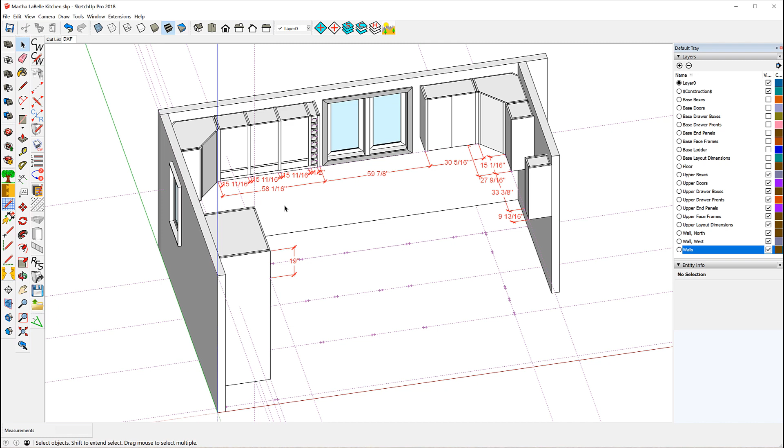So what we need here, I think the only thing we really need to know is notice that there are three similar boxes, or identical boxes actually, and they each have a 15 and 11/16 opening. The total box is 58 and 1/16. And notice that it starts right here.

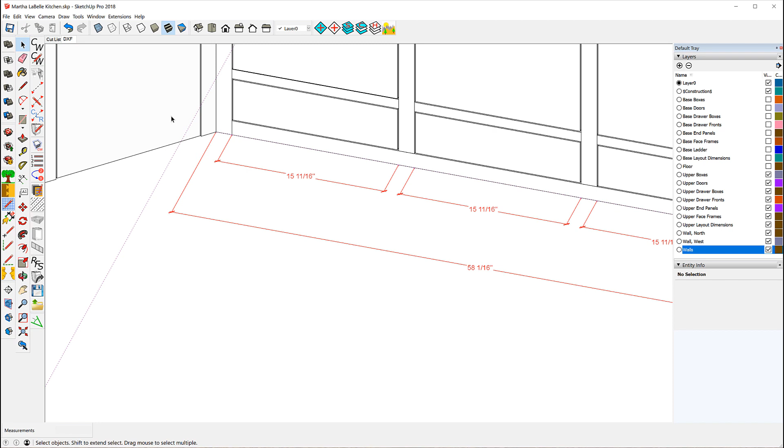It shares the same connector with this corner cab. You can see that here. This connector is the same connector as the corner cab. And you'll see how we do that in a moment. I think the only thing we have to remember is 15 and 11/16 opening and 58 and 1/16 total length. Let's get started. We'll go back to our model.

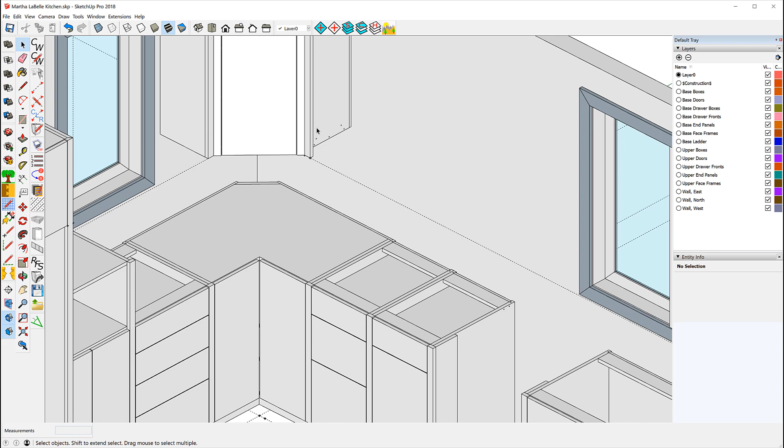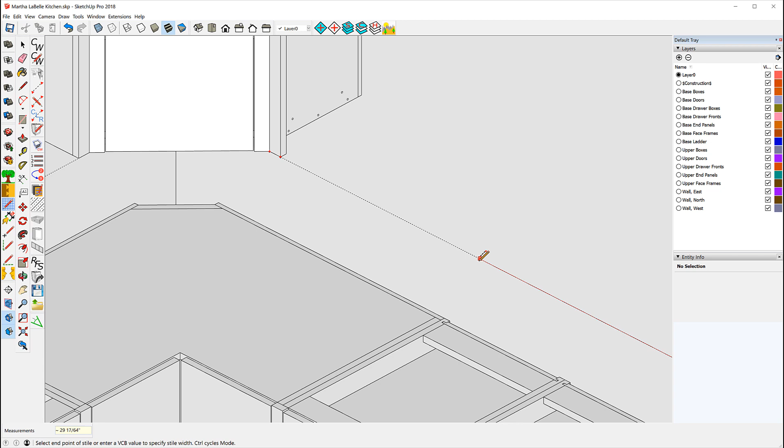Okay, here we're going to start with our story stick. And as I said, we're going to share this connector stile. So we'll start here, come out, make this a left connector. And now the total length, I'll use the distance tool, total length is 58 and 1/16. We'll come back this way, and that end is going to be a right stile. So there we are. Now we'll do the first opening.

And again, I'm going to use the distance tool, and that's 15 and 11/16. This is the opening. We don't want to encroach on that, so we have to come to this side of the marker. And we have our first connector. And now we want to use the distance tool again. 15 and 11/16. And again, we want to go to this side.

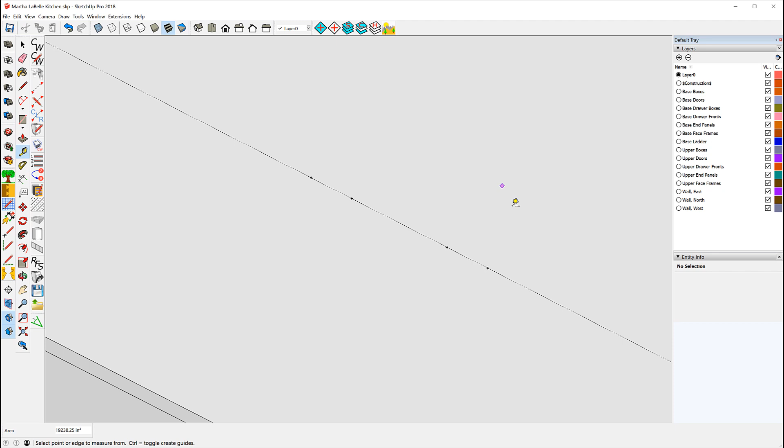One more time, we'll use the distance tool. 15 and 11/16, and we'll come over here. Now, if I remember correctly, this should be 3.5 inches, that opening. So let's measure that. Sure enough, it's 3.5. So now we have our story stick.

Now, let me go look at the reference drawing. Here's the reference drawing. This cabinet, this box, is going to have two compartments. One's going to be a drawer, and the other's going to be a door. Same here and same here. This one's going to have quite a few. 1, 2, 3, 4, 5, 6, 7, 8.

Now you'll notice that the divided upper only allows for the definition of 6 compartments, I believe it is. Or maybe it's 7. But in any case, it's not 8. So we have to do a little trickery. One of the things we can do is we can edit this cabinet just to see.

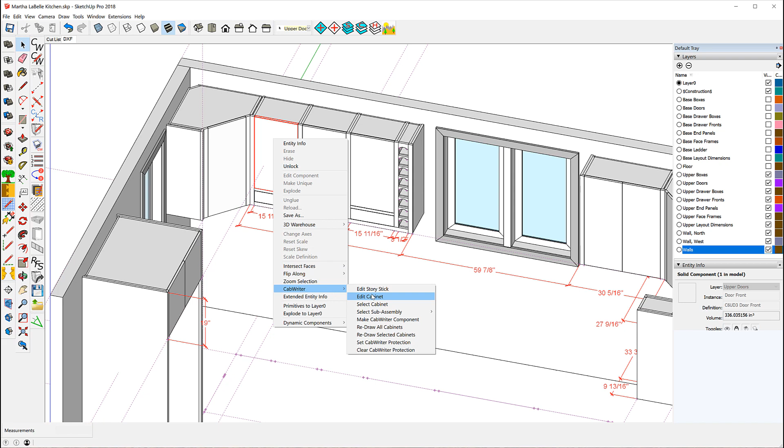Notice as I edit this cabinet, this one right here has 6 positions, or 6 partition positions, allowing for 7 actual compartments. And these numbers I'm not going to remember. So I've taken a picture of them and I'll save them.

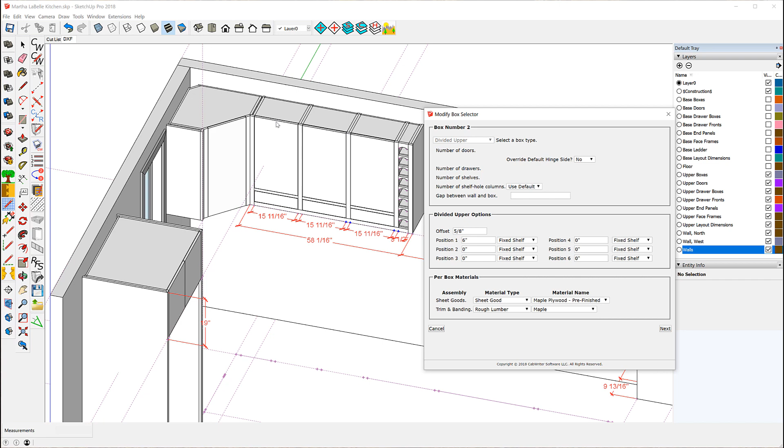Now these are identical, so if I say next, these are simple. There's a 5/8 offset and a 6-inch compartment here. And then the remainder of the box. I can't remember those, but like I said, I took a picture. So let's cancel this and go back to our model.

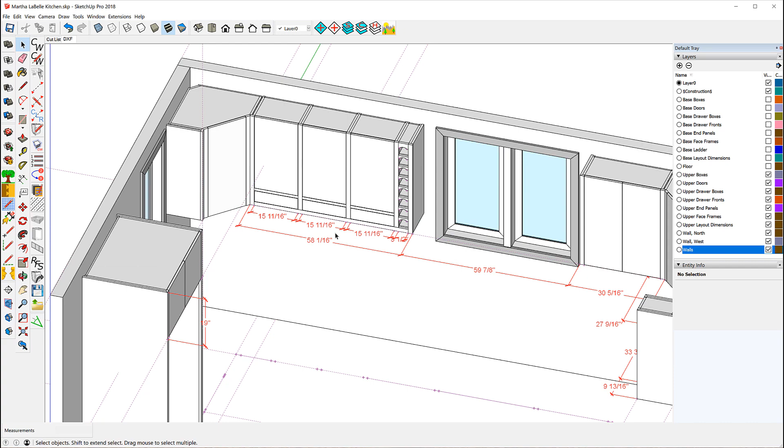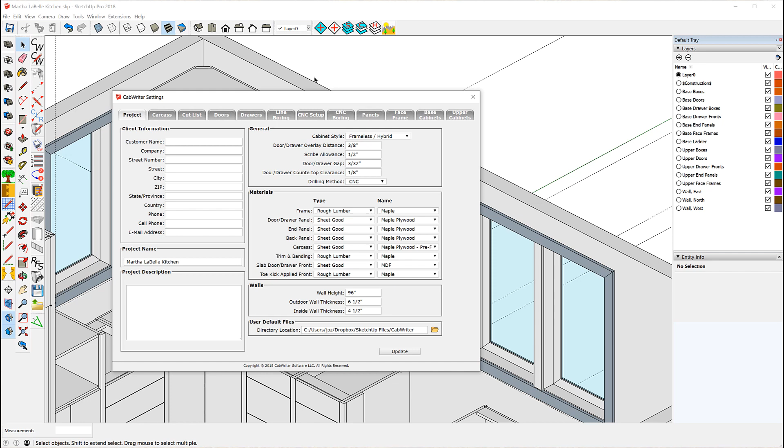Okay, so first thing we want to do is open up our user defaults and see if we have a wine cabinet set of defaults, and we do. So we're going to use those. We'll load them. And we can close them. We don't need to look at them right now. Let's go back to our story stick. And let's hit end.

Now the first thing it's telling me is that I have an opening that's less than the default minimum opening. In the defaults I have a minimum opening default which is set to 6 inches. And sure enough, this is 3.5 inch opening. Well, I'm not going to put a door on it or a drawer or anything like that. This is a wine cabinet.

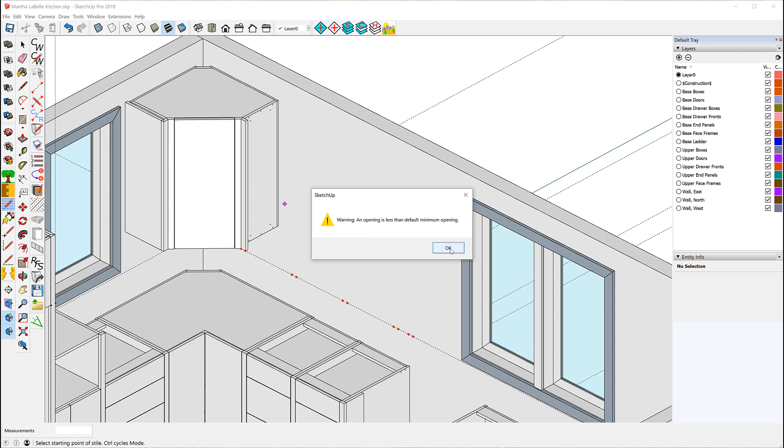It's going to be open, so I'm going to ignore this. Notice this is just a warning. It's not going to stop me from doing anything. So I'll say OK. And that brings this box up.

And it's looking at this first box. It wants to know about this first box. Well, I have my picture, like I said. And the first box is simple, 5/8 and 6. The wine cabinet is pretty complex. I'm just going to keep these off camera where I can refer to them, and then I'll just plug them in.

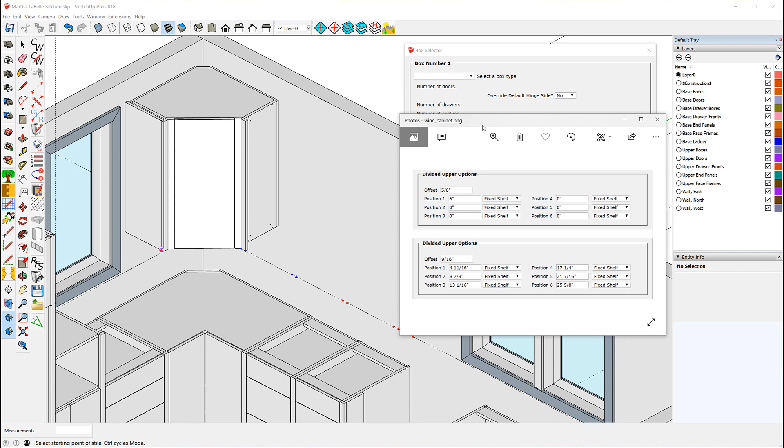By the way, these numbers I arrived at through an iterative process of guessing what they would be, drawing the cabinet, figuring out how much they're wrong by redrawing the cabinet with another set of numbers, and I think I probably even iterated maybe 3 times. You're going to have to do the same thing if you're designing this from scratch, but since I've already designed it in our reference model, and this is a course on how to use CabWriter, not how to do cabinet design, I'm going to just copy these numbers. So I'll leave these off camera and just refer to them.

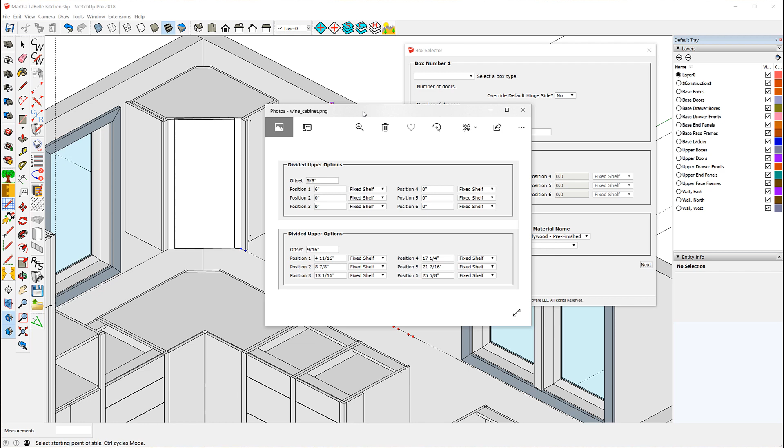Okay, so we'll select a divided upper. Notice that these become unlocked so I can enter the values I want. And first thing I'm going to enter is 5/8 for the offset, 6 inches for the first position, and I'll hit next. I want this next box, this one here, to be the same thing, so I'll just hit next. I also want this one to be the same, so I'll hit next.

Now I'm going to change things. This is going to be 9/16. This will be 4 11/16. 8 7/8. 13 1/16. 17 1/4. 21 7/16. And lastly, 25 5/8. And we'll hit OK and see what we get.

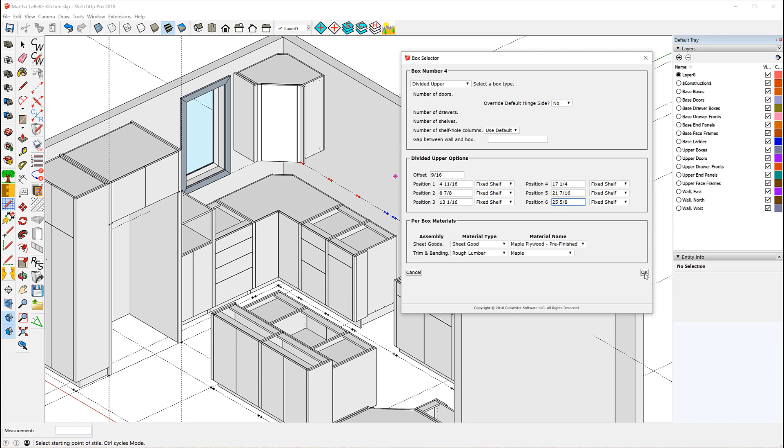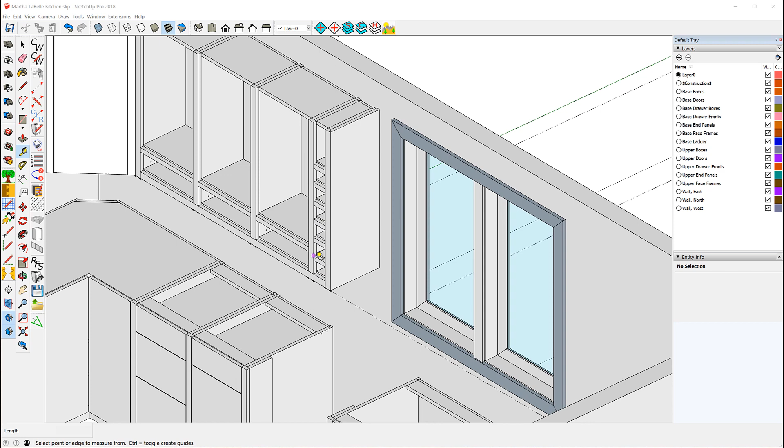There we go. We have what we wanted. Notice that I don't have enough dividers to finish this, but that's not a problem. I can just copy these up. The thing I want here is I want to keep my divisions equal. For instance, if I measure the distance between here and here, that's 4 3/16. And so what I want is for this next one to go up 4 3/16.

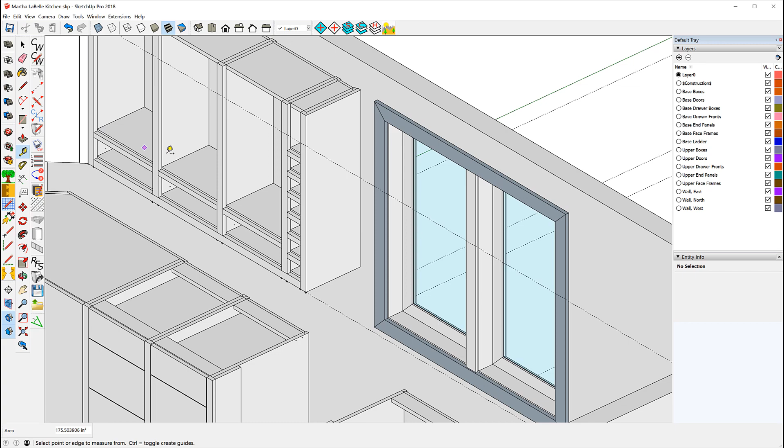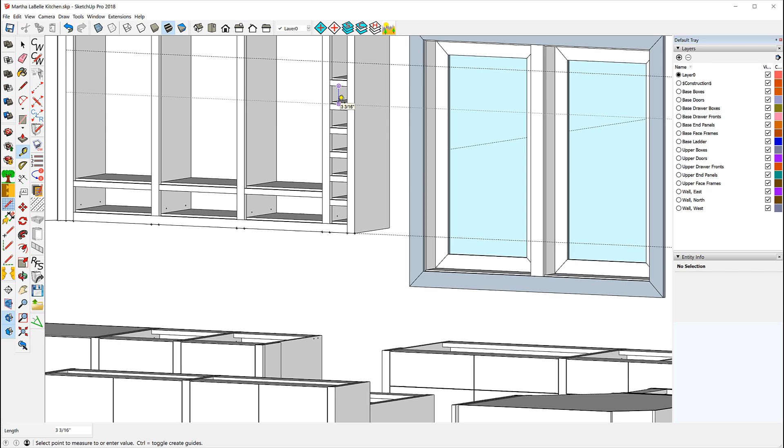And let's see if that looks right. That'll give me an opening of 3 3/16. And I think that's correct because that's 3 3/16. Okay, so what I want to do, and it looks like I have to move it up twice. Let's move this one up 4 3/16.

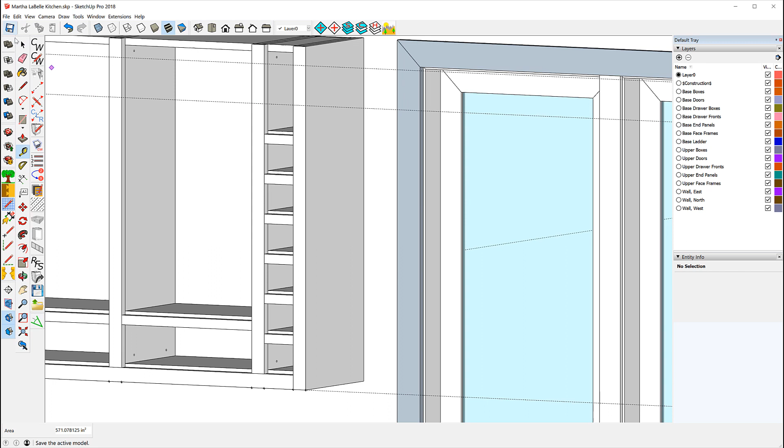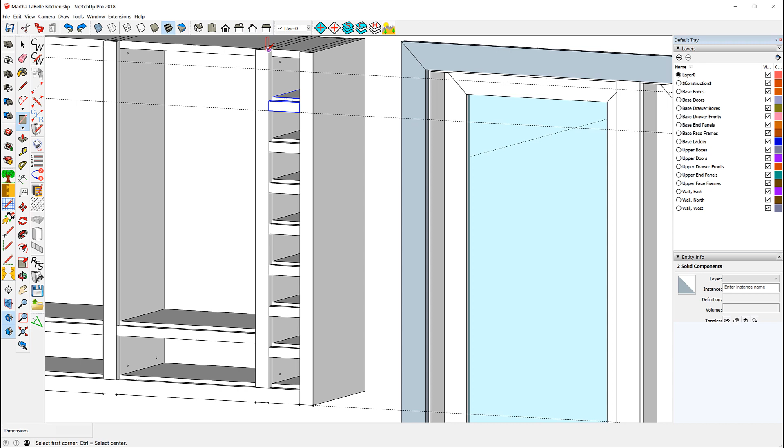Well, I think here's what we're going to do. We're going to take these two, unlock them, do a move copy right there. And now I think what I'm going to do is make a part to fill in here. So let me take the rectangle tool. Let's make a part right here. Push-pull it in to that point. Make it a component. I don't care about the component name right at the moment.

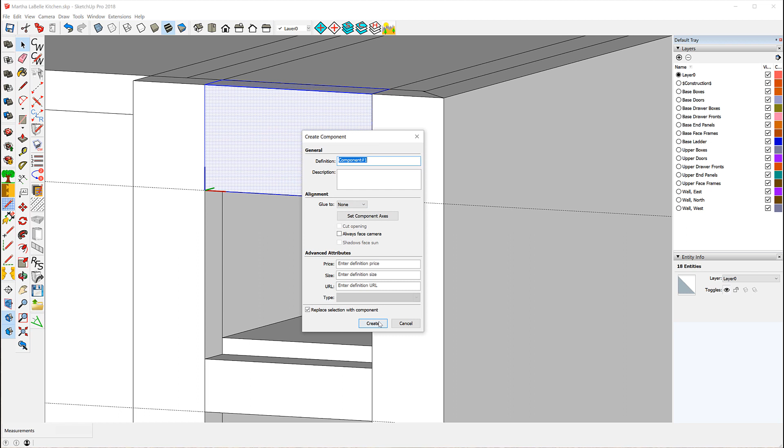What I want to do now is I'm going to use the Make This a CabWriter component tool to make it an official CabWriter component that follows the CabWriter rules. So I'm going to attach it to this cabinet, which is C24R, right there, C24R. And I'm going to make it part of the face frame. And I'm going to make it a mid-rail, just like this.

So let me make the C24R component type, part of the face frame. It's a mid-rail. And I'm going to call it upper wine rail. And since there's only one in the model, I'll give the instance name the same. I do want it CabWriter protected, so if I redraw this cabinet, it will still be there. And so notice now my definition name is C24R face frame part, upper wine rail.

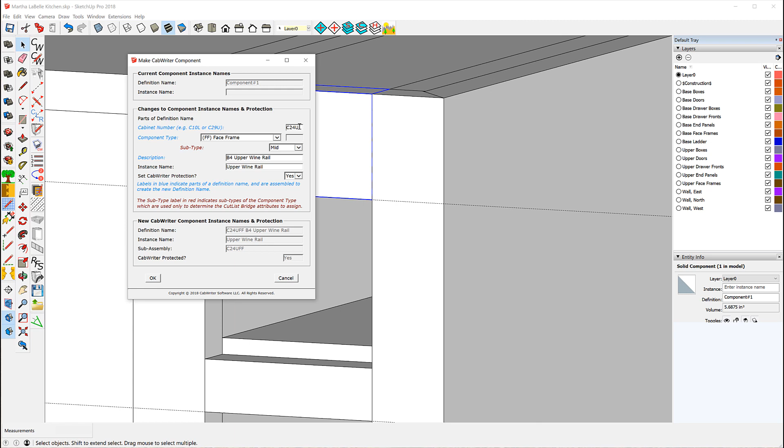And I can actually make this part of box 4. I'll make it part of box 4. So it's C24R face frame box 4 upper wine rail. It's called an upper wine rail. And I'll just say OK. C24R, C24U. Yeah, it's a U. And if I now look at this, it's C24U upper face frame box 4 upper wine rail.

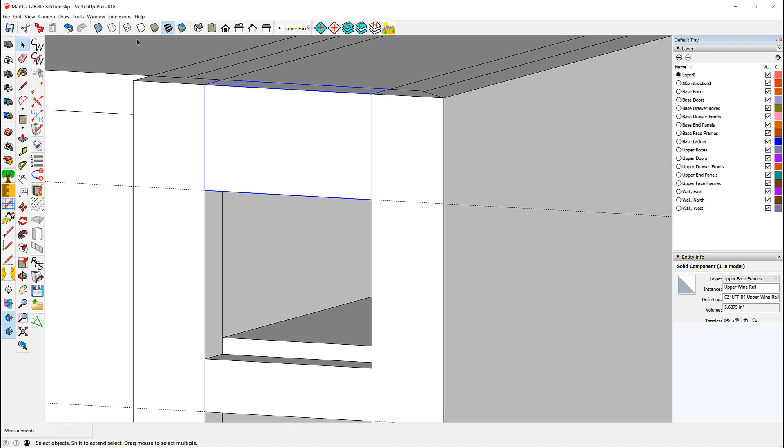And by the way, because we called it part of the face frame and a mid-rail, notice what happens if I look at the extended entity info. I've got all of the information about resizing and everything else in there. Okay, so now we've done that. Recall that I offset this by 9/16. What does that mean?

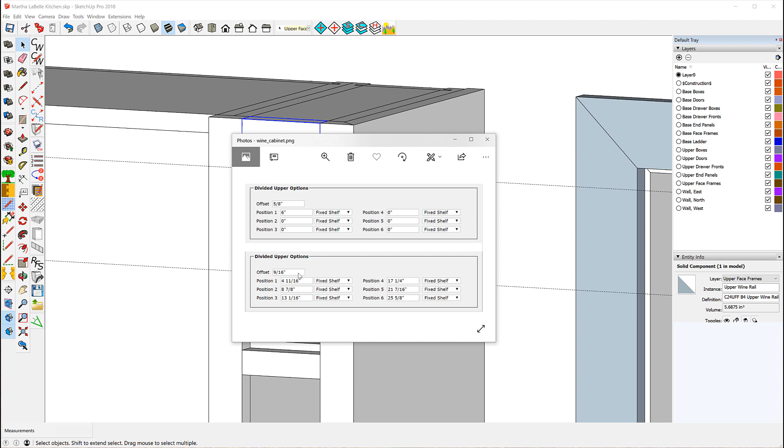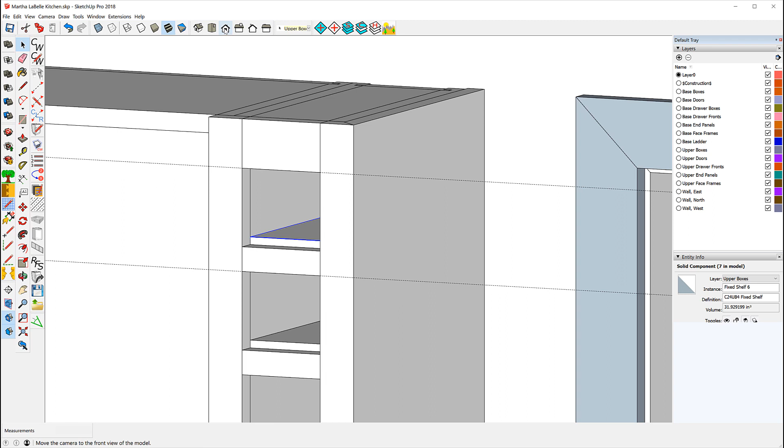That means normally this part here, the bottom of it, would be lined up with this, but I offset it 9/16. In other words, if I were to look at this face on and look at the X-ray, this is 9/16.

So what I want to do now is, to make the maximum opening I can, I'm going to put a little arc here. So I have a lot of opening for the bottle, but I don't want to go to 9/16 because then I'm going to run into the bottom of the shelf. So I'll cut it back by 2/16 and go 7/16. So let's try that.

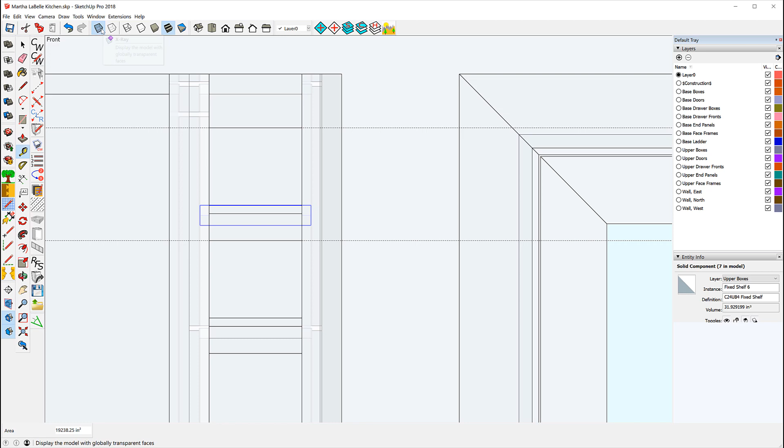So I'm going to move this up to 7/16. To be safe, I'll make another line. I'll just move that up 7/16. And by the way, while I'm at it, I'm going to do this one too, 7/16. And I'm going to come in a 1/2 inch. And I'll come in a 1/2 inch here.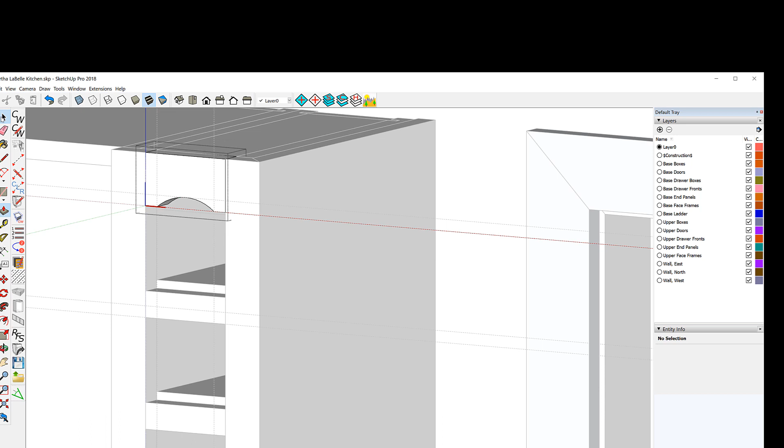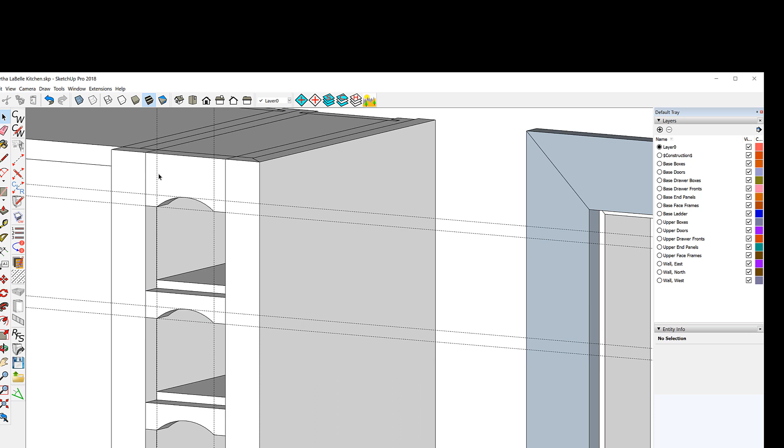Now I'm going to edit this. I'm going to use the arc tool. And I'll do the same here. Going to unlock all of them. Use the arc tool. Push that through. And clean up my... get rid of some of these.

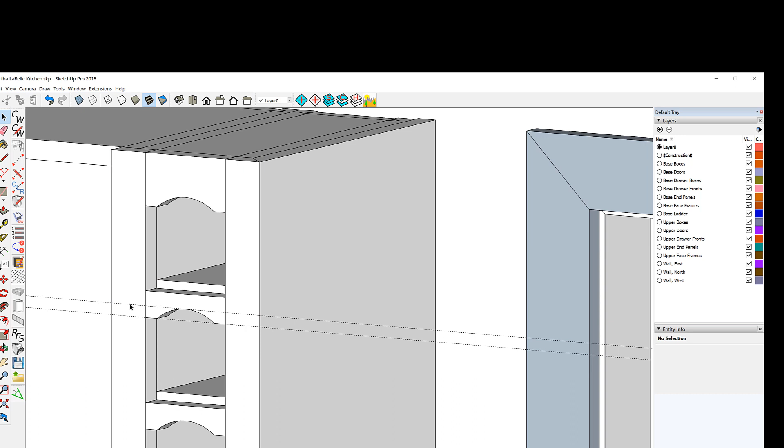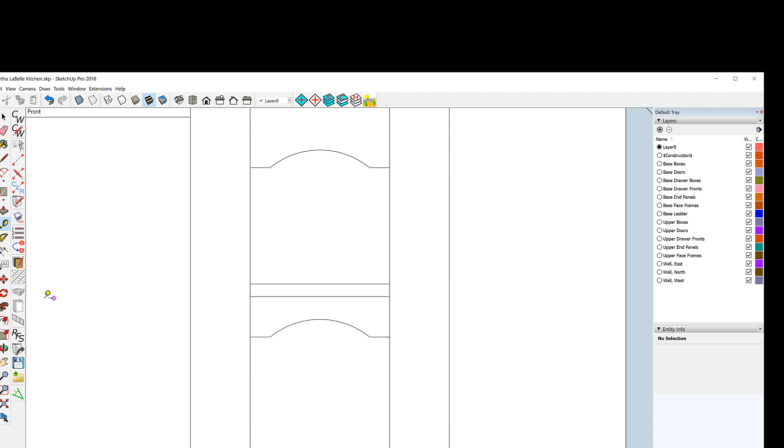All right, now what that does is it gives me an opening. Let's just look at this from the front. Gives me a wine bottle opening of 3 5/16. Most wine bottles are 3 to 3 1/4 inches in diameter. I feel good about this for a couple of reasons. One is it gives me 1/16 of an inch margin, but it's actually more margin than that. Because if you start putting the wine bottle in at an angle and push it in, eventually the neck gets narrower. So you actually have more margin than you think. So that'll work fine.

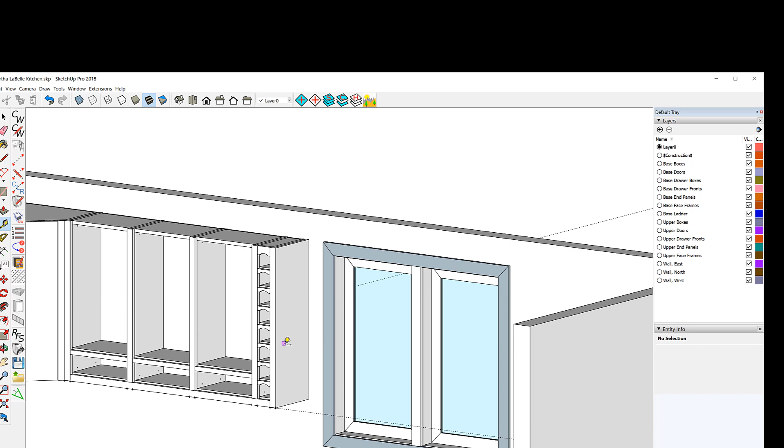Okay, we're getting close to 30 minutes here. I'm sure we're going to go over it. So I'm going to leave the doors and the drawer fronts and drawer boxes here until the cleanup tape. What I want to try and do, see if I can get the rest of these cabinets in here. I'm going to create another line here. Get the right tool, and I'll bring that line out 13 inches.

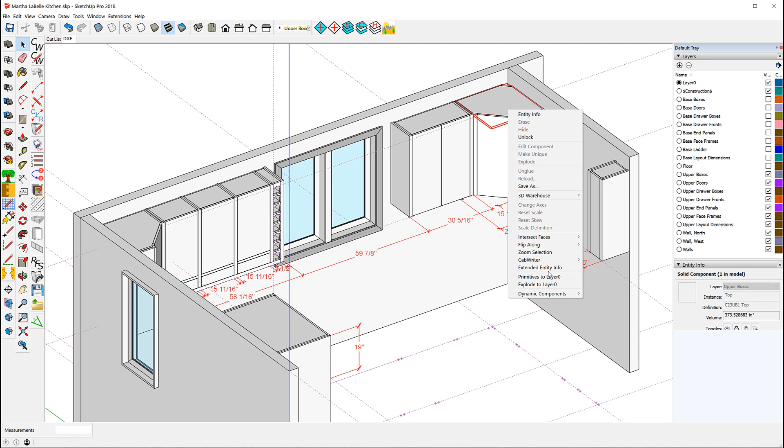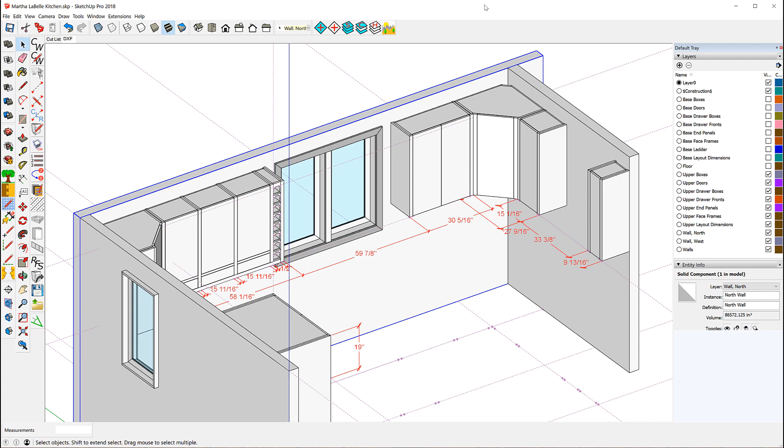And now I'm going to go back and look at my reference drawing. Okay, here I am at my reference drawing. And I've got a dimension here that tells me where this cabinet ends and where this one begins. Then it's a simple standard upper. And that's one cabinet. Then I have another cabinet over here with 2 boxes. And then finally I have this standard upper over here. So to save time, I'm going to take this reference and move it to the side so I can refer to it, and then just go back to our model and create these. And it should be real easy. So I'll just move this over here.

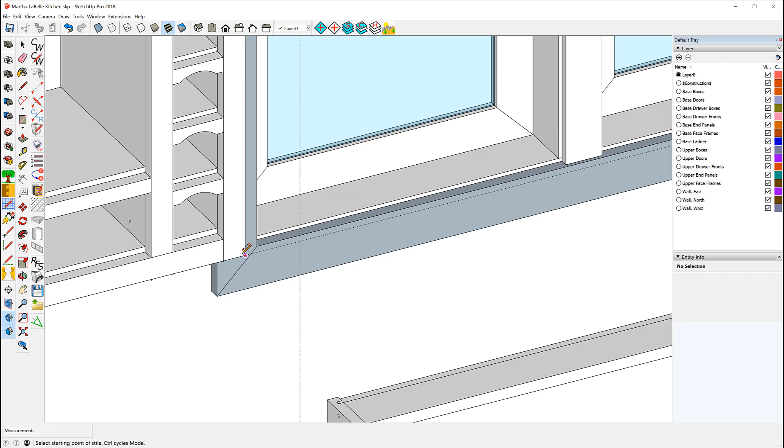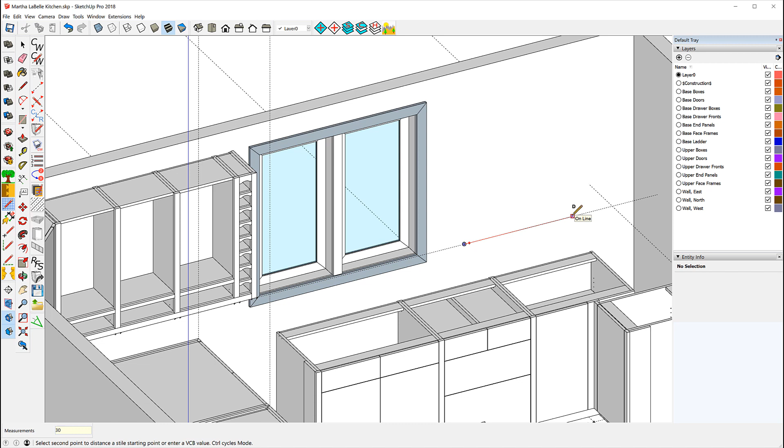Now that I'm back at this model, what I'm going to do is create a line that's 59 7/8 from here using the distance tool. 59 7/8. And it's going to be a cabinet that's 30 5/16 wide. And the left end of it is going to be a sheet. 30 5/16. This is going to be a connector here. And it's a standard upper with 2 doors.

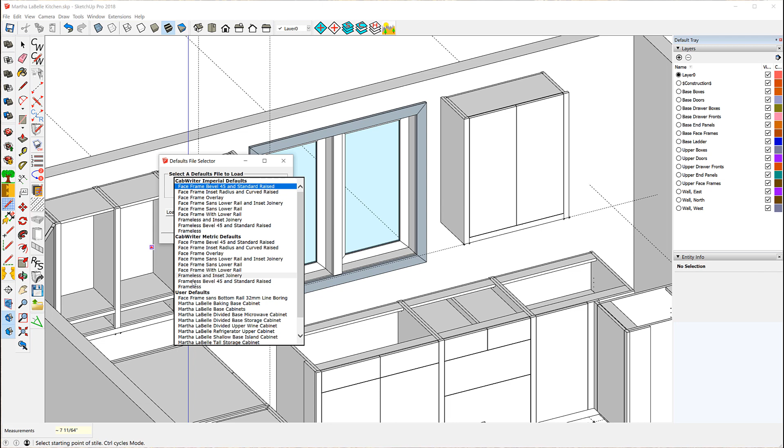Now I've got a little problem here. I didn't change my defaults back to the standard upper defaults, so let me do that now. And I can redraw that, and hopefully it'll get rid of this bottom rail. There we go. That's the cabinet we wanted.

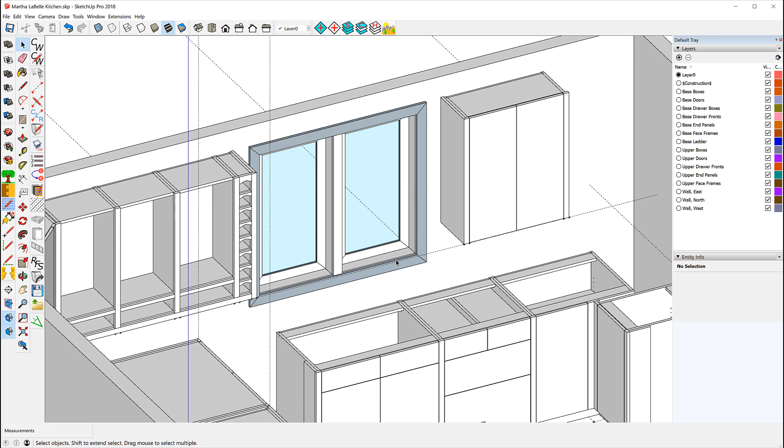All right, now this cabinet's going to be 2 cabinets starting here. And that's going to be a left pivot connector. And the cabinet is going to be 27 9/16. And that's going to be a right sheet.

And my favorite dimension for corner cabinets, 14 inches. We'll go back this way, hit end, and that's going to be a diagonal upper, 1 door. And this is going to be a standard upper, 1 door. Okay.

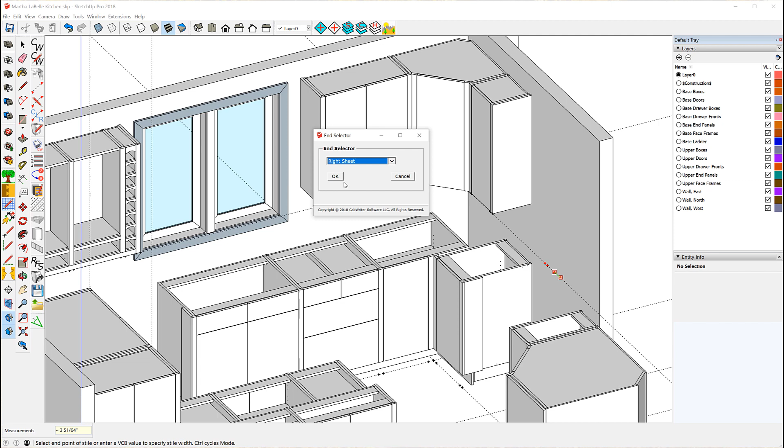And our last cabinet, we're going to have a hood here, so we're going to leave 33 3/8 of an inch. So with my distance tool, mark that out, come to this side, and that's going to be a left sheet. And it's going to be 9 13/16 wide. And I'll come back this way. And that's a right sheet. And it's going to be a standard upper, 1 door. All right. Notice that was designed to come to the end of this wall.

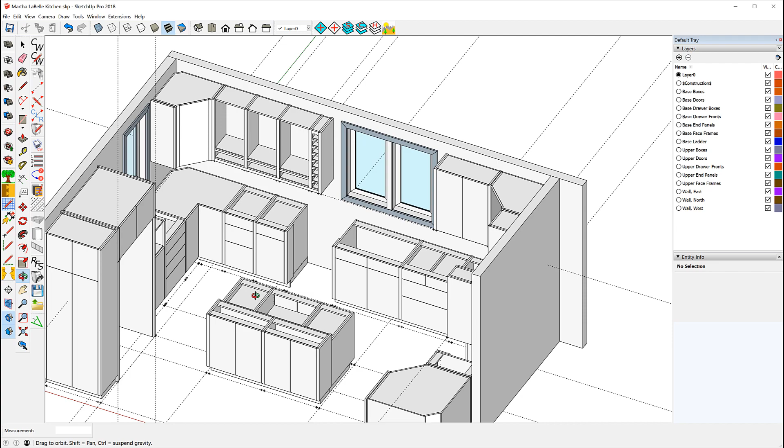All right, I now have all of my cabinets. Now there's a lot of fixing up to do, and we have some doors here and drawers here that we want to add. We'll do that in the next video in part 7. But basically we have everything we're looking for.